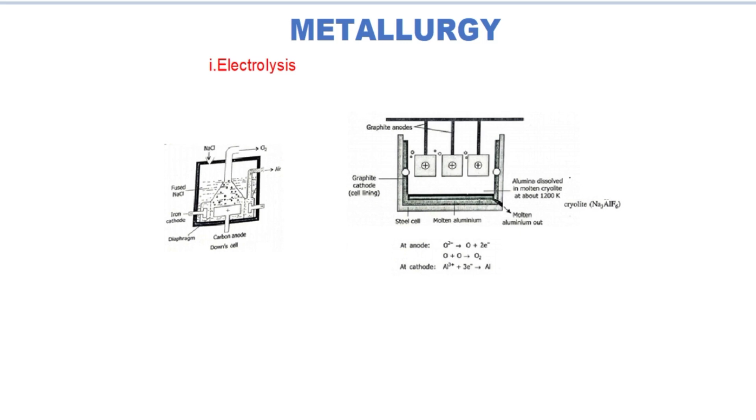The carbon immersed in the fused electrolyte acts as anode, while the carbon coated on the inner side of the iron vessel acts as cathode. At the cathode, aluminium ion gets deposited as aluminium. At the anode, oxide ion is converted into oxygen. This oxygen reacts with carbon, producing carbon monoxide and carbon dioxide. Thus, the anode gets dissolved during the electrolysis of alumina dissolved in molten cryolite for the production of aluminium. The exact reactions taking place at anode can be represented as

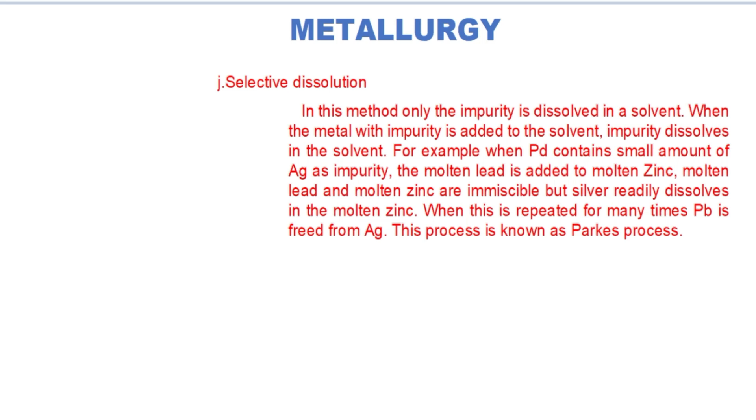The next method is the selective dissolution. Here, impure metal is treated with a solvent where only the impurity dissolves in the solvent. For example, when lead contains a small amount of silver as impurity, the molten impure metal is added to molten zinc. Only silver dissolves in the zinc. The molten lead is immiscible with zinc. When this is repeated many times, silver goes into zinc and lead is freed from silver. This process is known as Parkes process.

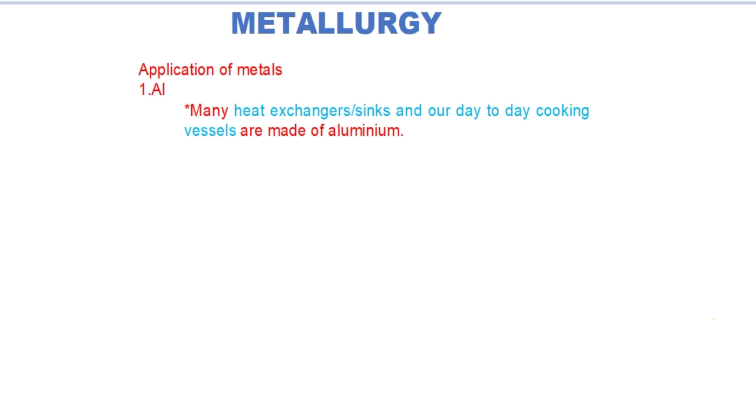Next, we shall discuss the applications of some metals. First, aluminium. It is the most abundant metal in the Earth's crust and a good conductor of heat and electricity. It also provides resistance to corrosion. So, heat exchangers, sinks, and cooking vessels are all produced from aluminium metal. As aluminium foil, it is also used as wraps and packing for food items.

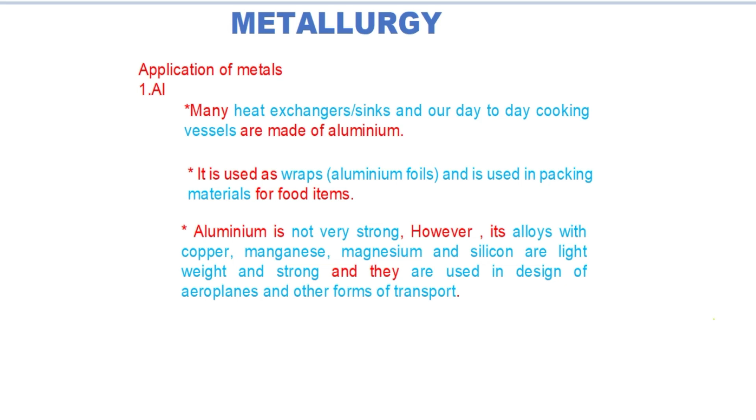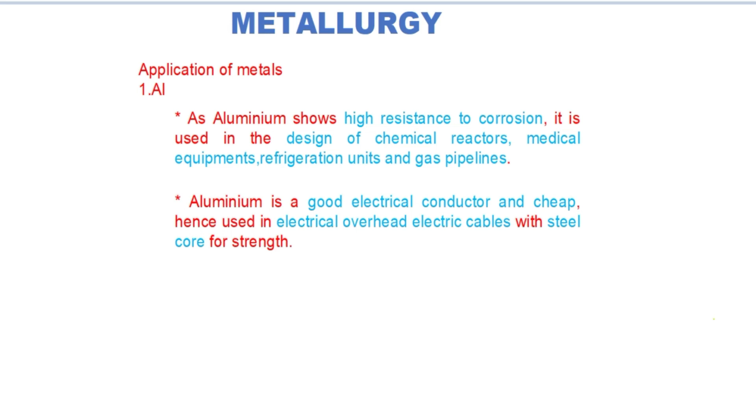Aluminium metal as such is not strong, but when it is alloyed with other elements such as copper, manganese, magnesium and silicon, lightweight and strong alloys are produced which are used in the design of aeroplanes and other forms of transport. Aluminium shows resistance to corrosion. Hence, it is used in the design of chemical reactors, medical equipment, refrigeration units, and gas pipelines. Aluminium is a good conductor of electricity and relatively cheap. Hence, it is used in overhead electric cables with steel core for strength.

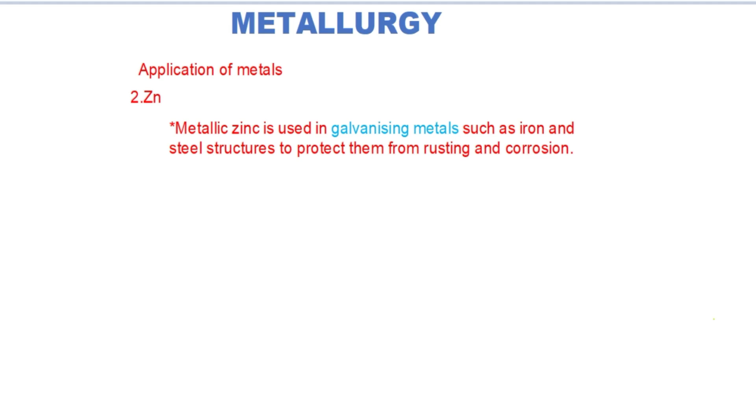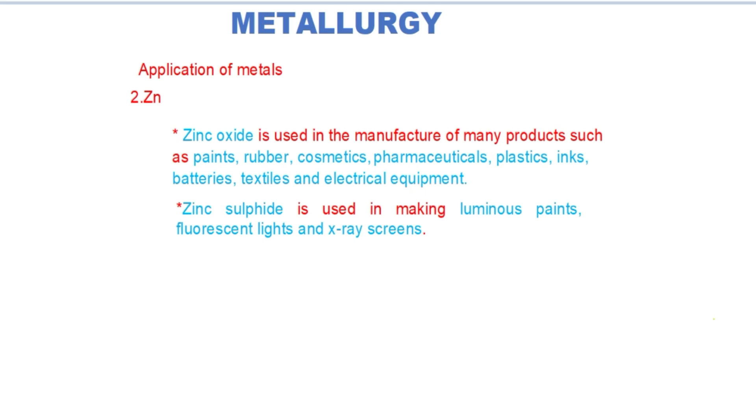Zinc is used in galvanizing metals, that is, it is used to protect other metallic elements from corrosion and rusting. Zinc is also used in die castings in automobile, electrical and hardware industries. Zinc oxide is used in the manufacture of many materials such as paints, rubber, cosmetics, pharmaceuticals, plastics, inks, batteries, textiles, and electrical equipment. Zinc sulfide is used in fluorescent or luminous paints, fluorescent lights, and X-ray screens. Brass, an alloy of zinc, is used in the production of water valves and communication equipment because it is highly resistant to corrosion.

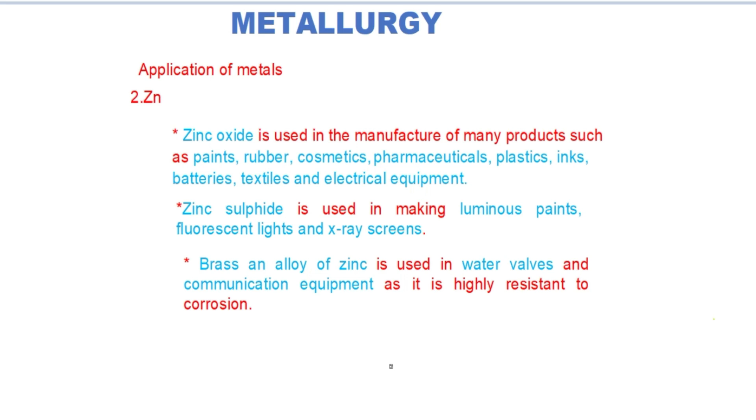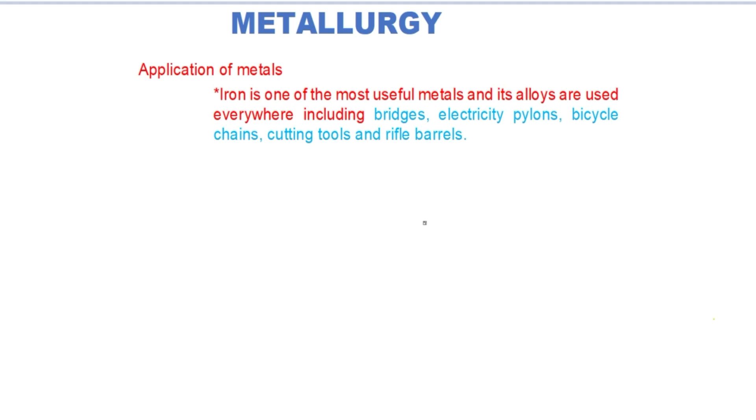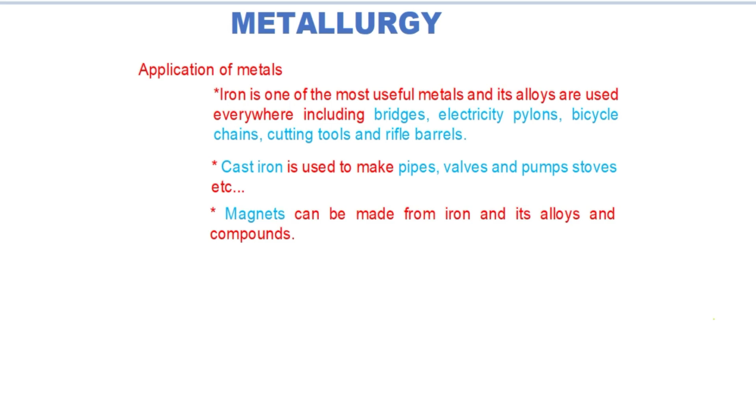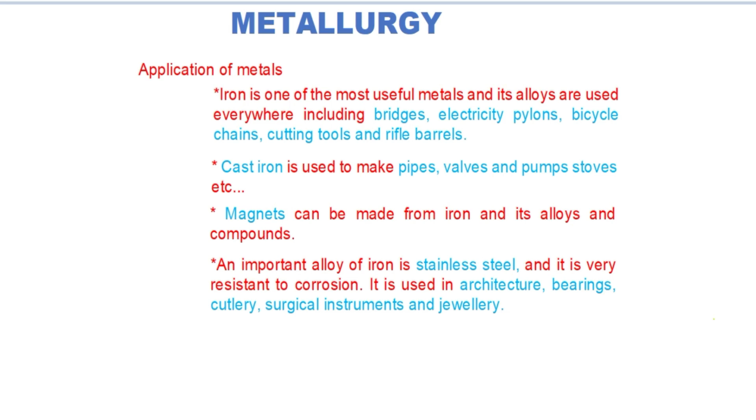Iron is used in many applications in our day-to-day life. Its applications include bridges, electricity pylons, bicycle chains, cutting tools, and rifle barrels. Cast iron is used to make pipes, valves, pumps, stoves. Magnets are made from iron and its alloys. An important alloy of iron is stainless steel. It shows high resistance to corrosion. It is used in architecture, bearings, cutlery, surgical instruments, and jewelry. Nickel steel is used for making cables, automobiles, and aeroplane parts. Chrome steels are stronger, so they are used in the manufacture of cutting tools and crushing machines.

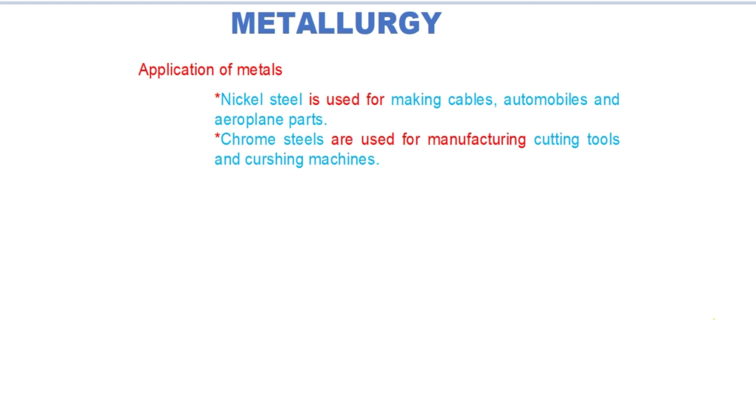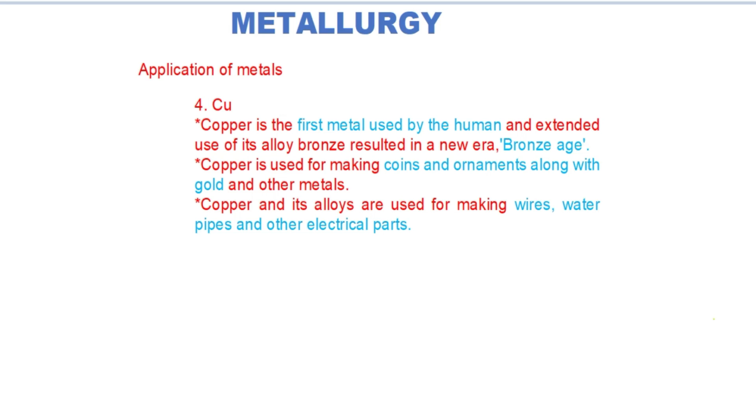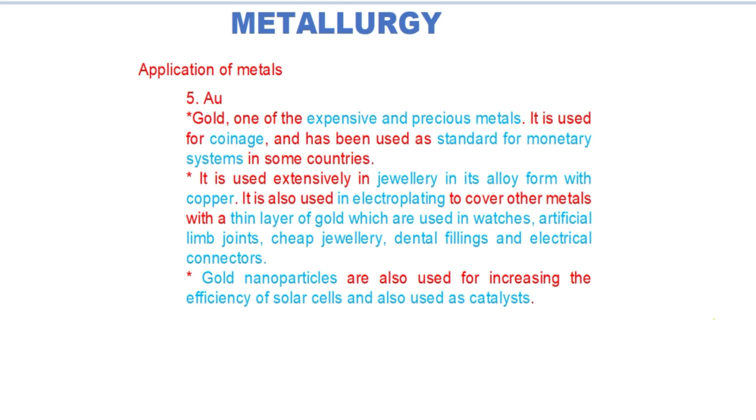Next, copper. It is the first metal used by human beings. It is used for making coins and ornaments along with gold and other metals. It is also used for making wires, water pipes, and other electrical parts. Next, gold. It is one of the expensive and precious metals. It is used in coinage, and in some countries it is used as standard for monetary systems. It is used extensively in jewelry in its alloy form with copper. It is also used in electroplating to cover other metals with a thin layer of gold, used in watches, artificial limb joints, cheap jewelry, dental fillings, and electrical connectors. Gold nanoparticles increase the efficiency of solar cells, and they are also used as catalysts.